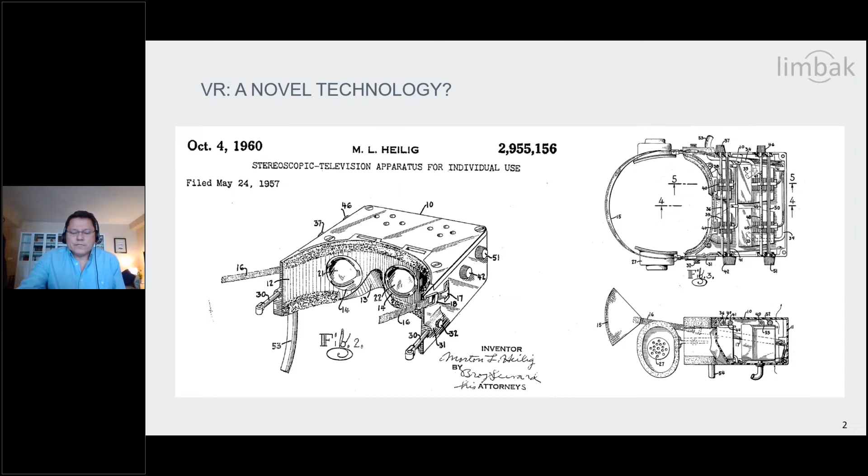I'm going to discuss the main challenges in VR, whose solution is expected to come from the optics, which is, in my opinion, the fourth technology that will have a dramatic improvement. So there are several features in a VR headset that should be optimized. First, the resolution, which is still rather low, and we can see the pixelation, which is particularly critical when trying to recognize faces or reading small text. Secondly, the headsets are quite bulky, which makes them uncomfortable for long periods of use. The field of view should be large enough to have an immersive experience, and it will also be interesting to have a high transmission efficiency of the optics, particularly if the headset is going to be working standalone.

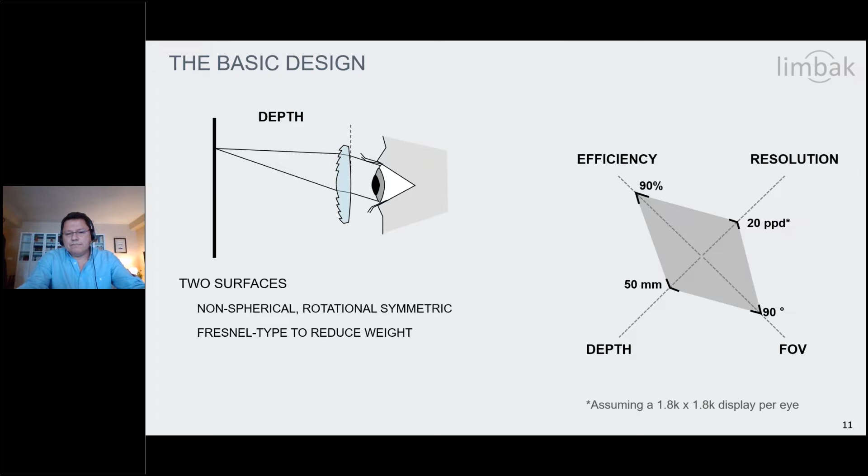I mentioned before that this field of view of, let's say, 90 degrees is sufficient to get good immersion, but it is definitely smaller than what we can see normally, because our human vision system is able to capture up to, let's say, 200 degrees field of view horizontally. And you could apply that basic design to this field of view, but you would do that at the expense of making the headset even bulkier.

The field of view is usually measured from the rims of the lens towards the center of the pupil when the pupil is looking frontwards. And the lens should illuminate not only that pupil, but a larger area. The reason for that is because you need to accommodate the eye rotations without losing the image, or the eyeball shifts associated to certain tolerances or the different IPDs of users.

This makes that usually we talk about the eye box, which is like a large pupil that is calculated taking into account those expected eyeball shifts and rotations. Of course, the eye box concept is in reality a 3D one, so you also have an eye box definition for performance of the device in the Z direction.

So let's start exploring the resolution limits. An ideal headset should be such that we can see the virtual reality in the same way we are looking at normal reality. And for that, we will need the resolution of that headset to reach the human eye resolution, which is 60 pixels per degree or 30 cycles per degree, typically.

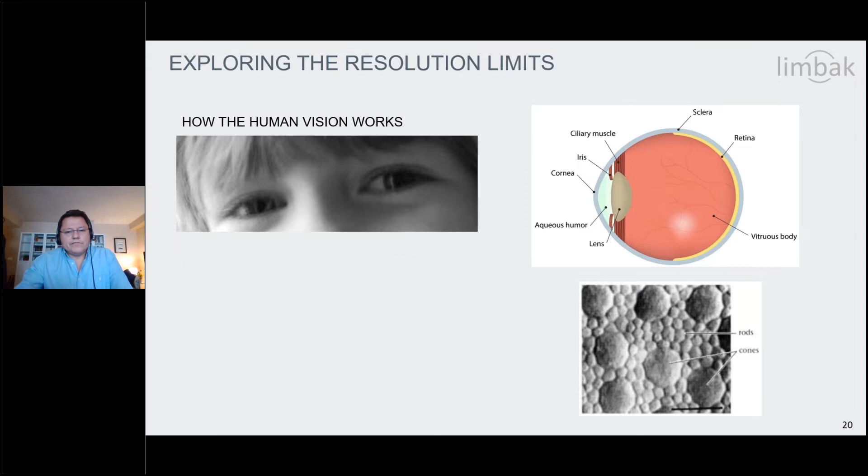But when you go away from that, at a peripheral angle different from 0, your resolution is very low. You can check this just putting a text in front of you and gazing in a different direction. If you gaze in another direction, you really can't read. But we have the impression that we see well everywhere, and the reason is that we are continuously rotating our eyes.

In reality, those rotations are not that wide. The statistics say that 85% of our rotations occur within only a 30-degree full angle field of view. So this is also important information to take into account.

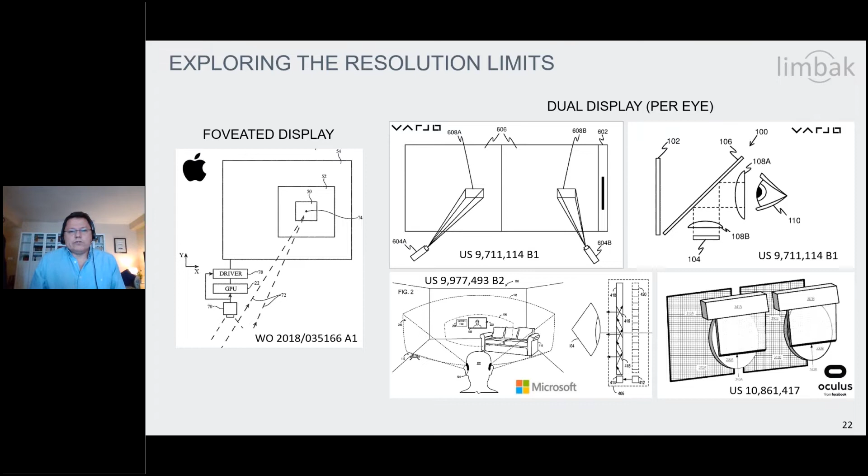The first commercial product using two-display headsets has been released by Varjo, a high-end headset which provides over 60 pixels per degree, so human resolution, in the high resolution insert in the scene, using the approach that we showed in the slide before.

In Limbak, we have been developing our virtual reality technology that we call ThinEyes, and in particular, we have developed one technology that we call passive foveal super resolution optics. We say passive because we don't need eye tracking to apply it, and it's based on two main features.

The first one is that we use a strong variable magnification to make the pixels denser where they are normally gazed and coarser in the peripheral regions. So the display itself is uniformly spaced in pixels, but through the optics, we are changing that pixel distribution in the scene.

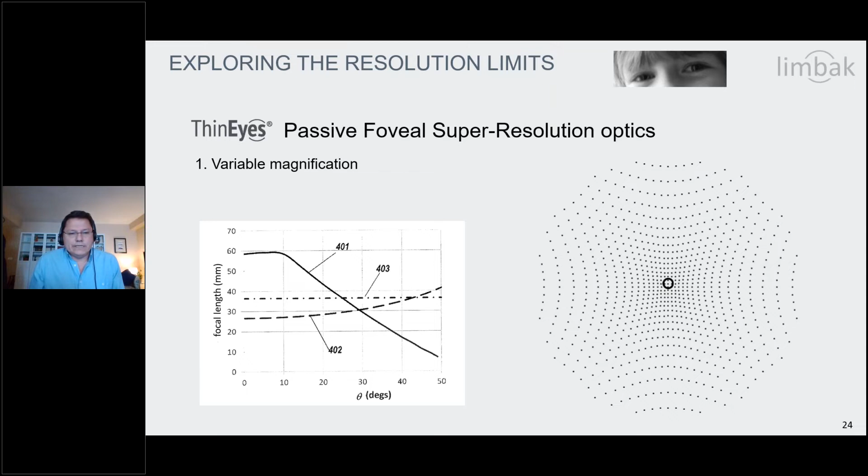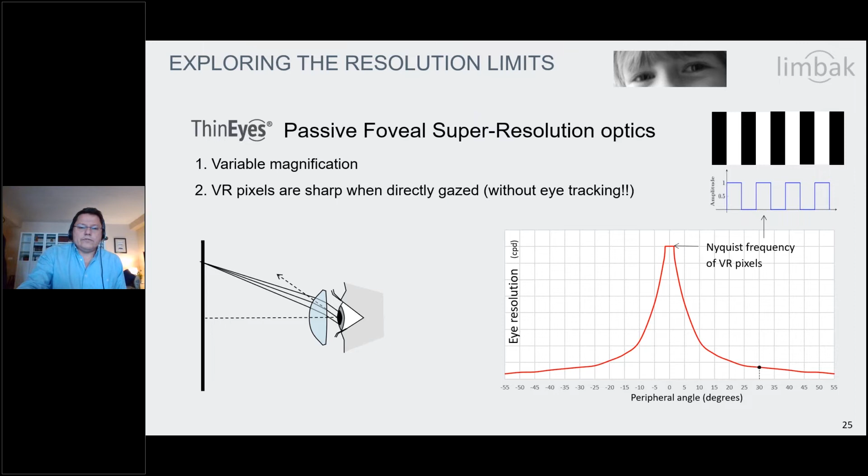But what happens when we rotate our eye and look frontwards? That same pixel that was lit in this direction is now seen by the eye in a peripheral position. So the eye is looking frontwards, and there is a peripheral angle. So these rays are not hitting the fovea anymore, but the peripheral retina. And then what we have to achieve is that our resolution is better than only that one, not more.

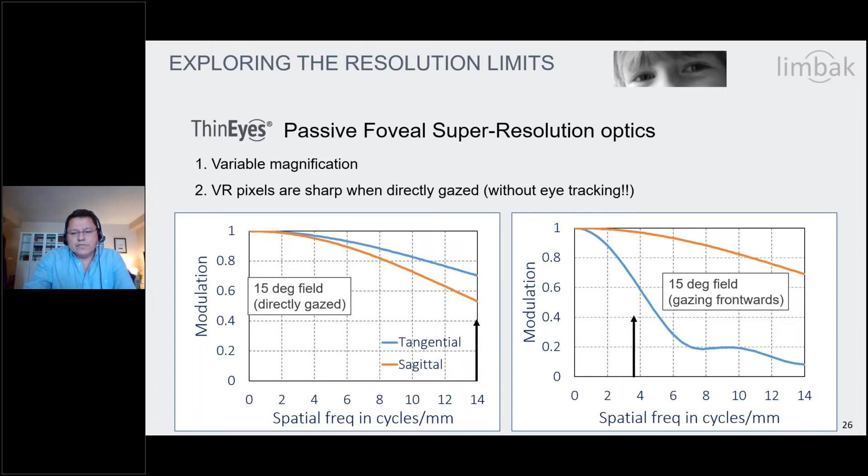This is an example of a dual lens design featuring this passive foveated super resolution. And this is the comparison with a conventional lens. It stays at high efficiency, and we are able to increase the resolution close to 50%, so from 20 ppd to 29 ppd, just by changing the optics with the same display.

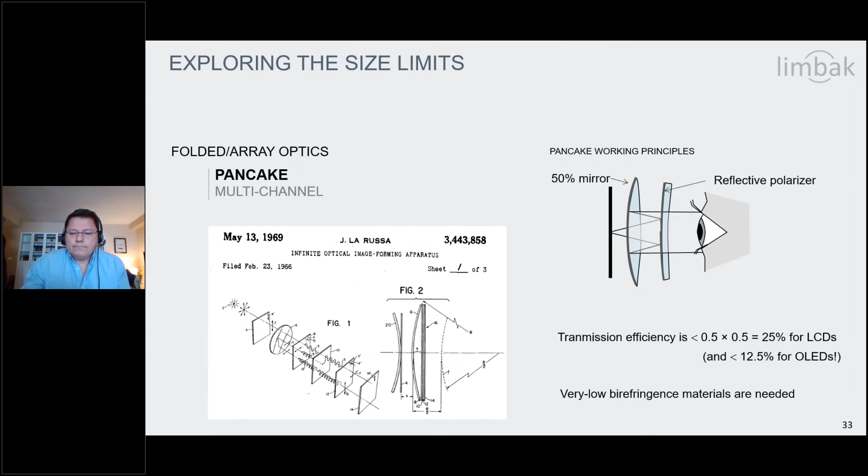So how does the pancake compare with the conventional design in these 4 parameters? It's much more compact, so the thickness is reduced dramatically, and the efficiency is low, as we mentioned, and the other parameters remain the same.

Over these last years, you may have seen in the press different pancake prototypes that have been shown around by different companies, some of them using micro displays, some others using large area non-crystalline backplane displays like the mobile phones, with different fields of view. Some of them are smaller and some are bigger.

And this last year has been the first release of a commercial product based on pancake, by Huawei. This is a very compact design of 90 degrees field of view using 1600 by 1600 pixels per eye. And this specific design includes the prescription correction that I mentioned before, in particular for myopia, up to 7 diopters. So you don't need to use glasses with it.

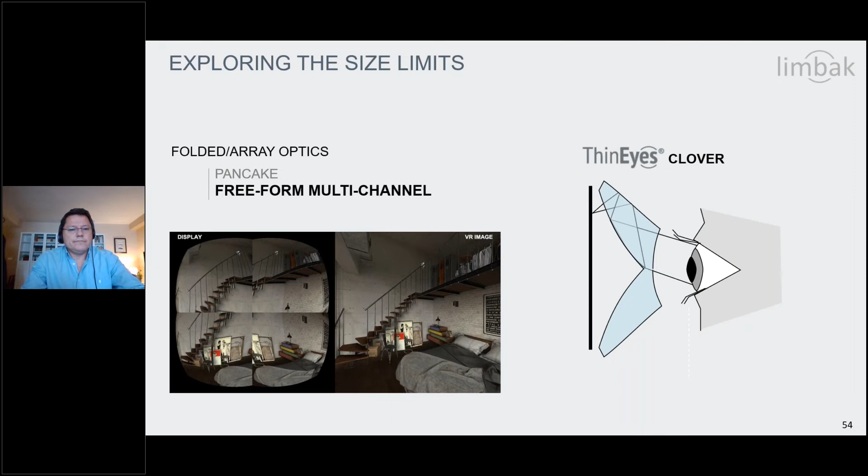And in one case or the other, the only difference is that in the rotational symmetric lens, you have the coefficients for a one-dimensional function, and here you have, apart from the 4 segmentations, a 2-variable function to define the distortion correction. And you can see this working in this video. So this is the image seen through this 4-fold lens, and this is the image on the display that you see on the left. But the user doesn't distinguish there are 4 images on the display. It's just perfectly blended.

We have been working also on an advanced version of the Clover using pupil tracking. If you follow the pupil, you can make a dynamic adjustment of the different sectors, and this allows you to diminish the area of pixels which is duplicated in the 2 images. As a consequence, using pupil tracking, you can increase the resolution of this 4-channel device by 20%, surpassing that of conventional lenses with the same rest of parameters, like the field of view. As I said, we still maintain a very high efficiency.

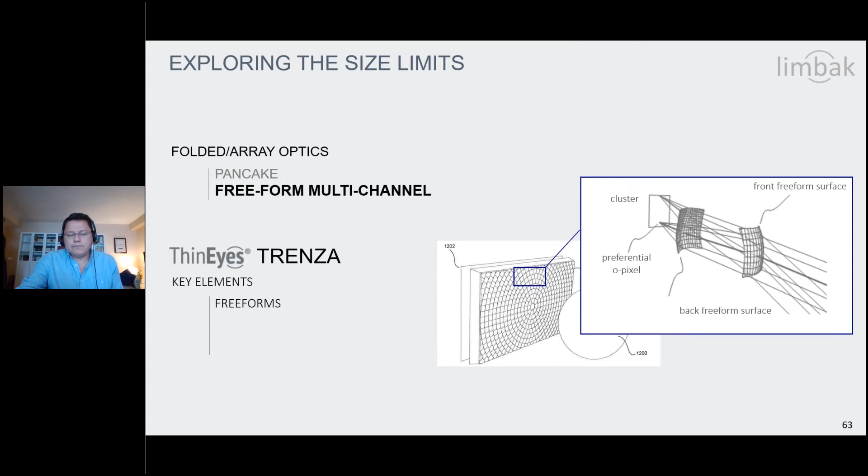First, we use freeforms intensively in the design. We also incorporate the passive foveated super resolution that we introduced before in order to increase the resolution with respect to a conventional option, and also adapt the resolution to the gazing and non-gazing situations. And third, we use pixel interlacing, which is a controlled projection of display pixels through the different lens channels to remove redundancy and increase the VR image resolution dramatically.

So Limbak is participating in a European project called Phabulous, which is a consortium of many European companies and public research institutions to create a pilot line to manufacture mini and micro optics with a variety of technologies. Trenza has been selected as a use case to check and challenge the pilot line that has been developed. And this is an example of one Trenza array. These are the 2 sides, which show the fully free-form lenses with 8-fold symmetry that are going to be manufactured within this Phabulous project. We're in the first phases of it.

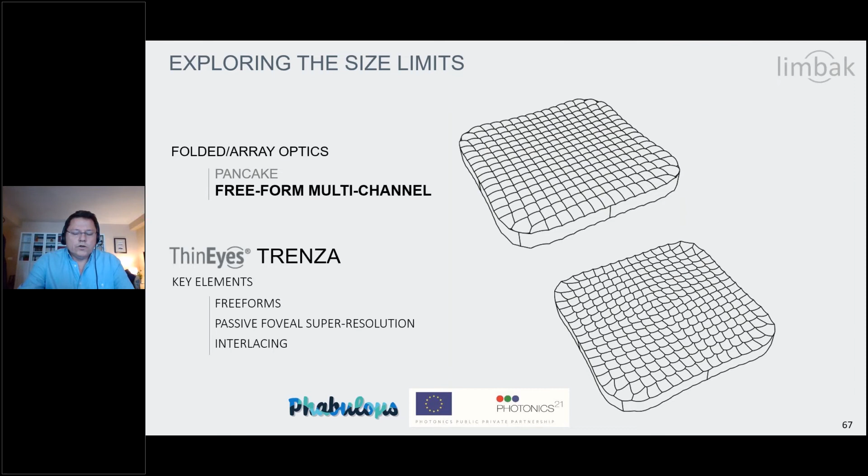So this is the front view of one of the sides, and this is the mold for making the lenses later, manufactured by one of the partners in the project, the originator, which is a Belgian company called Wielandts UPMT, that has done an excellent job producing a surface profile error which is extremely low, below 100 nanometers in RMS, also with very good surface roughness. So we are now in the process of going to the replication of this to create the lenses. That is going to be done by SUSS MicroOptics. And I hope that in the next months, we'll see results of this. This is proof of concept in manufacturing.

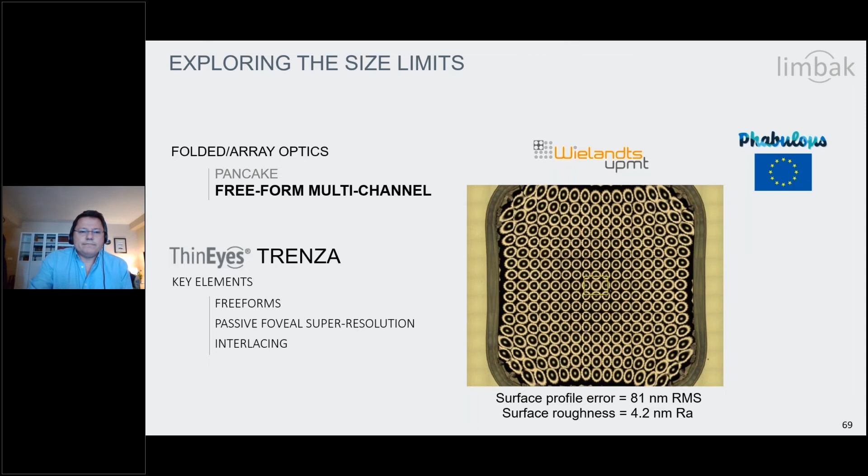And well, to finish with the challenges, I'm going to talk about providing accommodation in headsets. So we mentioned before this conflict between vergence and accommodation. And what happens in present headsets is that the lenses are creating a virtual image at a certain distance where the eye lenses accommodate. But this accommodation distance is different from the vergence distance when the virtual object is far from this plane. So there is this mismatch that, of course, does not occur in real operation.

When the mismatch is small, it's okay. Our brain can support it. But if it becomes too big, what happens is that our brain finally gets tired. You have cyber sickness or dizziness, or even double image or blurring when it's too aggressive. So it's something that, for the future, many research groups and companies are working to solve.

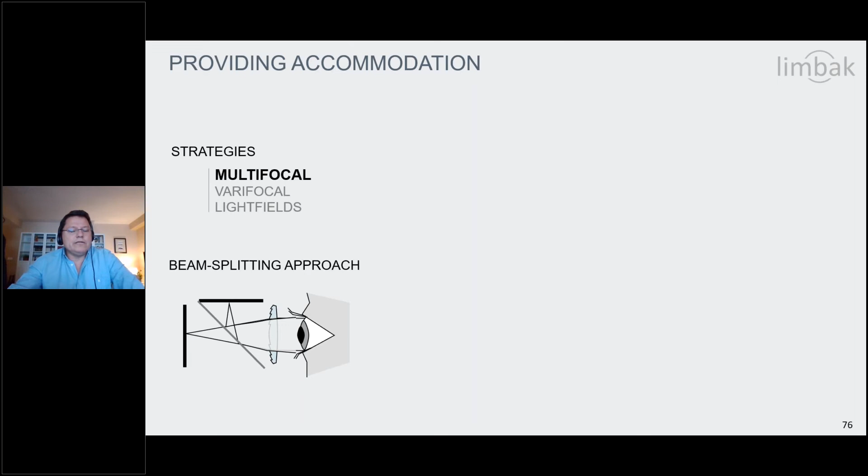So let's discuss specific approaches. A basic conceptual idea would be, for instance, doing a beam splitting, in which these 2 displays are at a different z distance. This way, you will be able to light one or the other display for each pixel, at pixel level, to provide that bifocal solution.

Another approach, also by the same authors, corresponds to the use of polarization lenses in the system of the pancake architecture. So these polarization lenses are lenses which have two possible focal lengths associated to the polarization that is impinging on them, the circular polarization, and with the help of switchable half-wave plates, you can commute whether one is active or not.

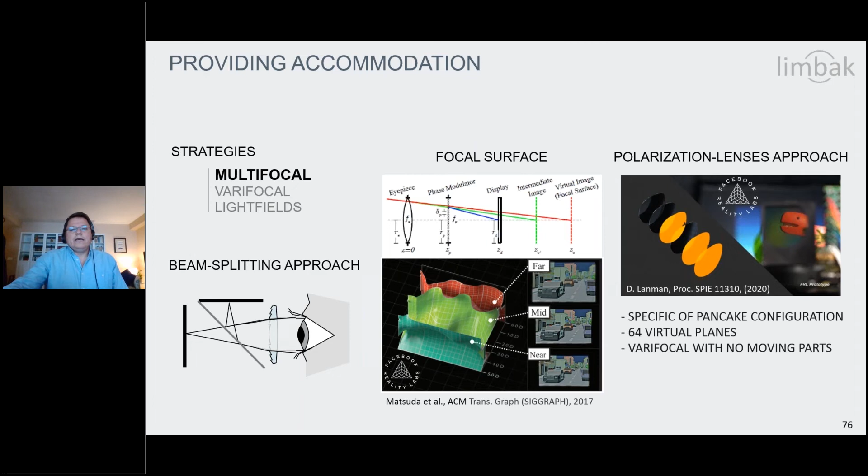So in this pancake configuration, they introduce a sandwich that is split here, so they could be changing different combinations to achieve 64 planes. So they can move the full plane, not the surface, in this case a plane, in 64 steps. So in reality, this is close to a continuous movement, which is what we call in the next section a varifocal. But in this case, there are no moving parts, it's just electronically controlled.

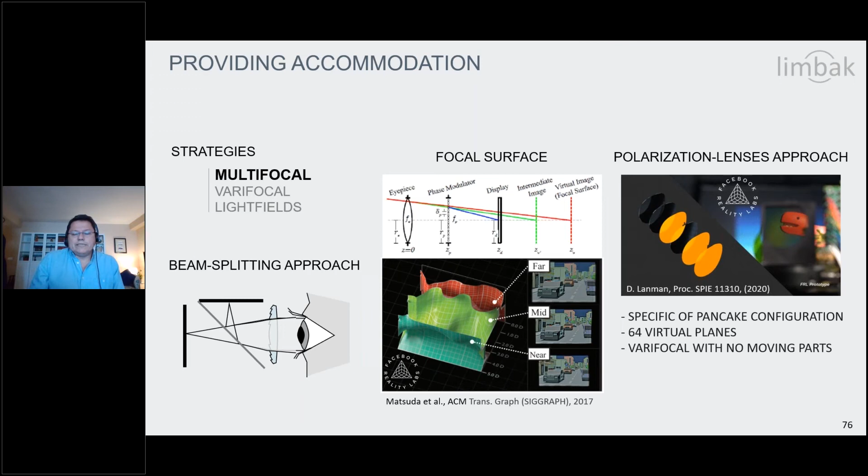Notice the difference between this approach and this other approach here, because here we are moving the plane completely, so we are not providing a pixel-level accommodation, but if the content requires that most objects are close, like reading a book, you can move the whole plane. Of course, it also serves to compensate for myopia correction of the users.

Let's go to the next one, which is varifocal, in which a first concept to achieve it would be just to shift the display continuously on axis. For instance, if you move it to this other position, the virtual plane will get closer. And this is what was proposed by Oculus in the Half Dome prototype, moving the displays independently with actuators in the z direction to be able to produce these shifts.

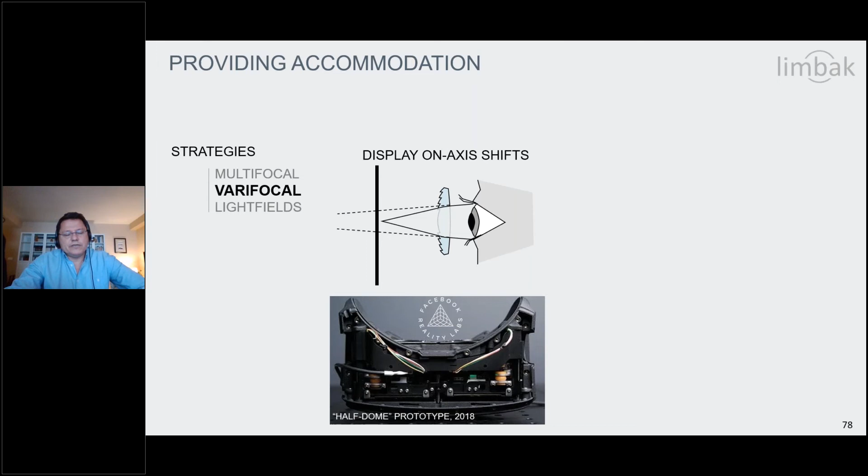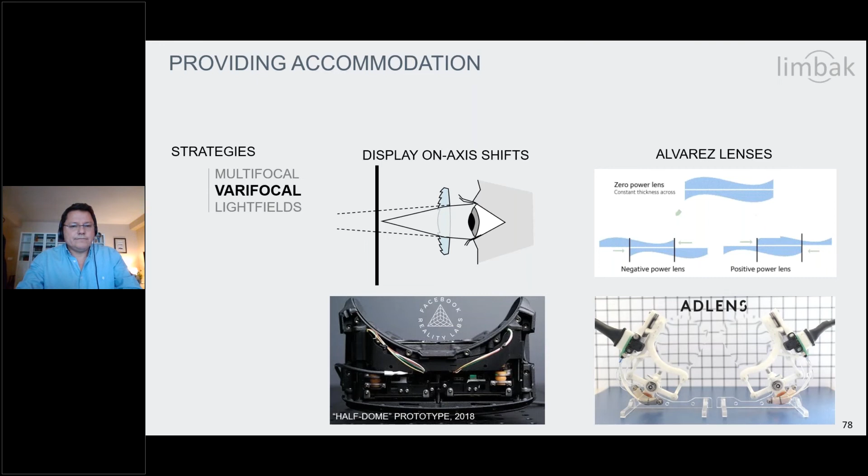There has also been another approach proposed by Adlens using motorized Alvarez lenses that, with lateral movements, are also able to move the full plane continuously, as in the other case. And these previous strategies, the multifocal and the varifocal, are alleviating the vergence accommodation mismatch, but they are not perfectly solving it.

One of the strategies trying to make a perfect correction of the vergence accommodation mismatch is what is called light fields, in which what you try to control in the system is the luminance of light rays that depend not only on position, but also on direction. So with those two reference planes, what we would like is to fix in our system the function of the luminance of the four variables of the two planes.

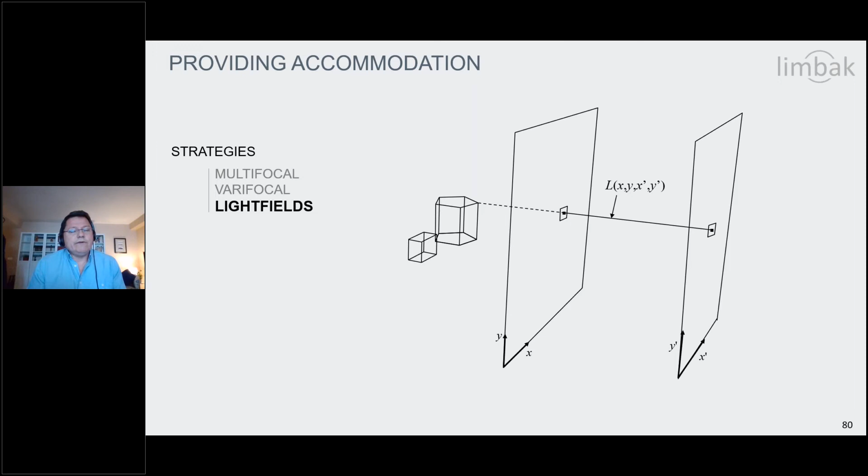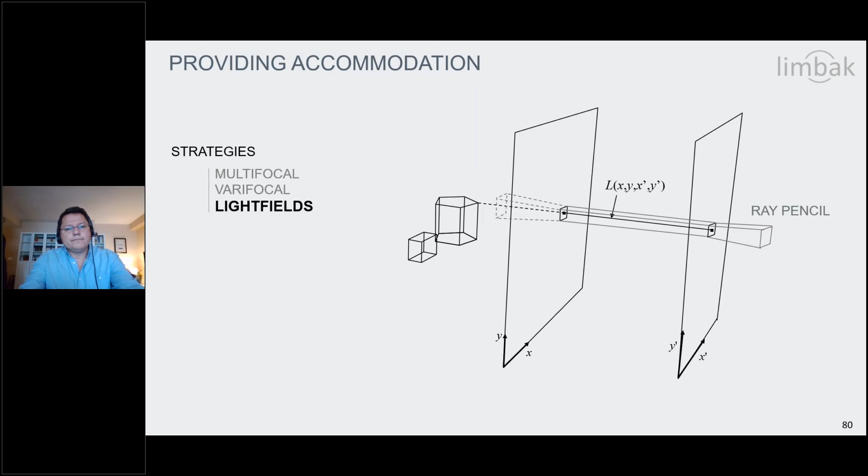In reality, because we work with pixelated devices, so it's discretized, when we talk about the ray, we are talking in reality about the ray pencil, which are all the rays that go across those two surfaces. One way to do this that was proposed by Huang and Wetzstein is to use two stacked displays in which this one is the emitting one with a backlight on it, and this other one is just transmissive. So the virtual images are shown here. So all the pencils of rays are defined by the pixels of these two virtual images. So these are the two reference planes.

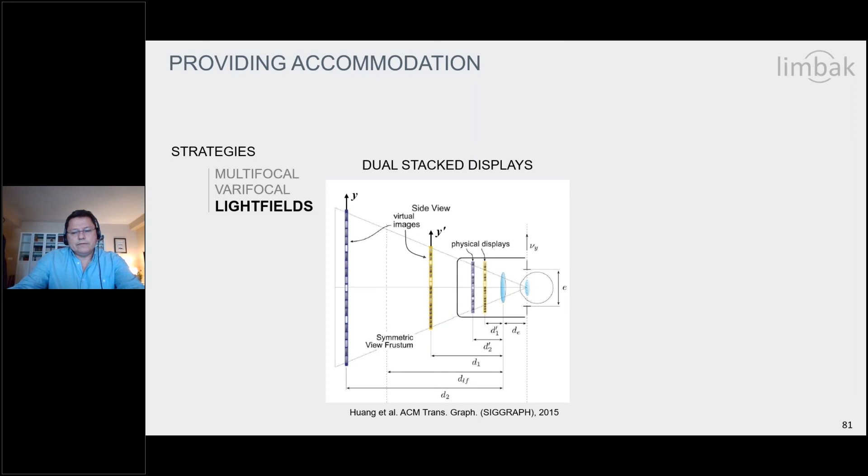Of course, you don't have the degrees of freedom to fix a four-dimensional function. In this case, what you have is two-dimensional functions, and they tackle the problem with an approximation method using a factored expression of that luminance.

So we have been working on this issue at Limbak too, and we have conceived what we call human vision adapted light fields. And these are based on three key elements. First, we have identified the pixels that provide accommodation, and we have defined what is the best density of those pencils in two reference planes. And this way we can reduce dramatically the number of pencils that we use.

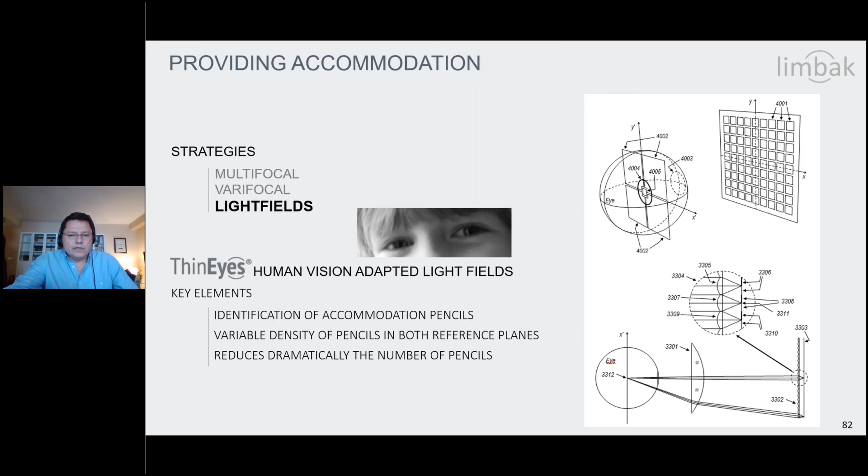And this is an example in which we are using these two reference planes. In this case, we change the density of pencils in particular in this one, but it can be done in the other. And this is a particular way to provide such kind of light fields.

And to finish, just as a summary, we have seen the VR optical design faces multiple challenges. We need to increase resolution, decrease the size and weight. We would like also to increase the field of view, to keep the efficiency high, and to minimize vergence and accommodation mismatch. And new optical technologies are coming to address them, in particular, for instance, using dual displays and foveation, also with the help of eye tracking, using multi-channel or folded optics, and with multifocal, varifocal, and light field approaches.